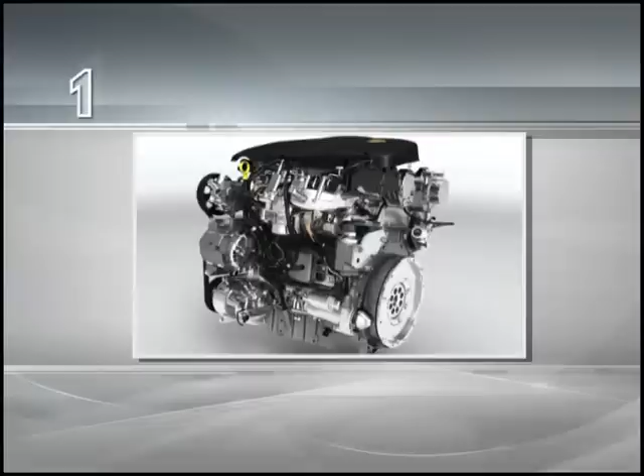The Insignia's A20NHT is the first direct injection petrol engine featuring both a turbocharger and variable valve timing to be used in a saloon car. These technologies provide the Ecotec engine with added power and responsiveness, while simultaneously reducing fuel consumption.

The engine has a power output of 162 kilowatts or 220 horsepower at 5,300 RPM and reaches its maximum torque of 350 Newton meters between 2,000 and 4,000 RPM. The A20NHT is based on the Z20NHH engine from the Opel GT.

In contrast to this engine, however, the power steering pump is in a different position. However, it continues to be driven by the V-belt. The position of the vacuum pump on the cylinder head housing is also new, as a result of which the housing has been redesigned in this area.

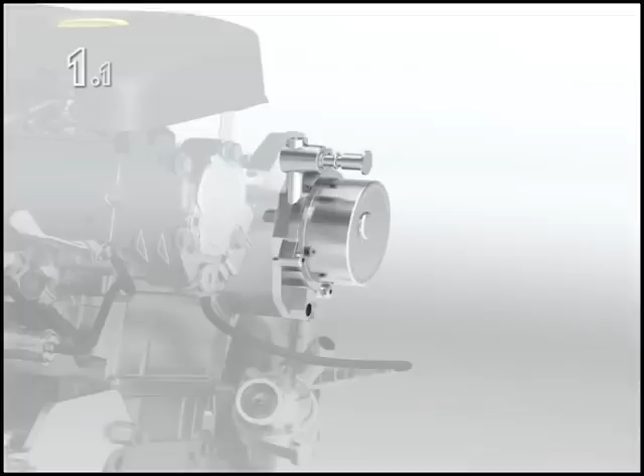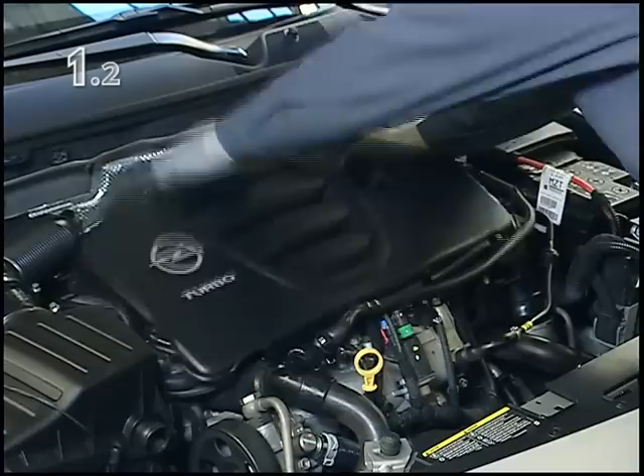Replacing the turbocharger in an Insignia with the A20NHT engine and all-wheel drive is a relatively complex procedure. First, the coolant must be drained and the battery earth cable disconnected. Lift off the engine cover and remove the air filter intake pipe. Remove the intercooler intake pipe and unscrew the turbocharger exhaust heat shield.

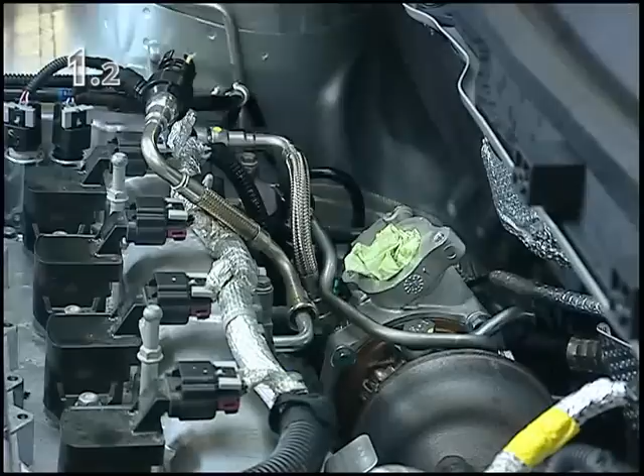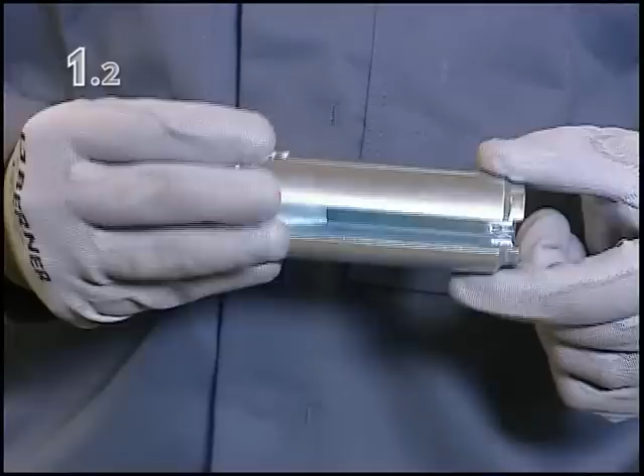Unscrew the coolant return line as well as the coolant feed line. Detach the vacuum hose from the turbocharger bypass valve. Detach the plug for oxygen sensor 1 and use the special service tool to remove the oxygen sensor.

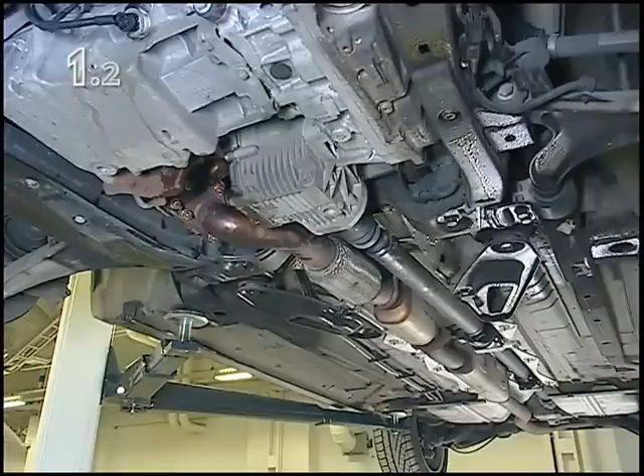Unscrew the 4 nuts for the catalytic converter from the turbocharger and detach the front wheel on the right-hand side. Undo the steering column universal joint to relieve loading on the steering gear. Detach the rear exhaust pipe as well as the propeller shaft. This procedure is described in detail in video VT76. Now unscrew the front exhaust pipe. The catalytic converter bracket and oxygen sensor 2 can now be removed.

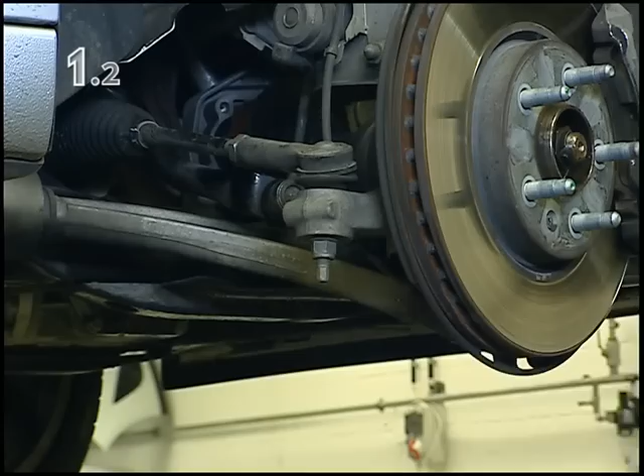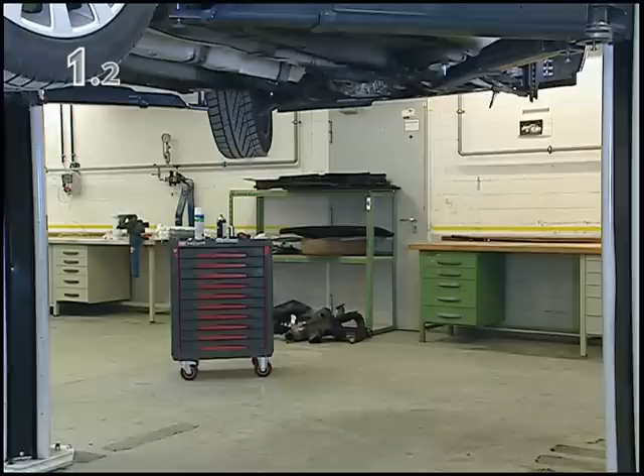Undo the stabilizer shaft link, as well as the tie rod. Remove the two lower plastic clips from the right-hand front wheel house trim. Likewise, remove the lower plastic clips on the front bumper fascia. Support the front axle body using a hydraulic jack at the location shown, and remove the front axle body reinforcement.

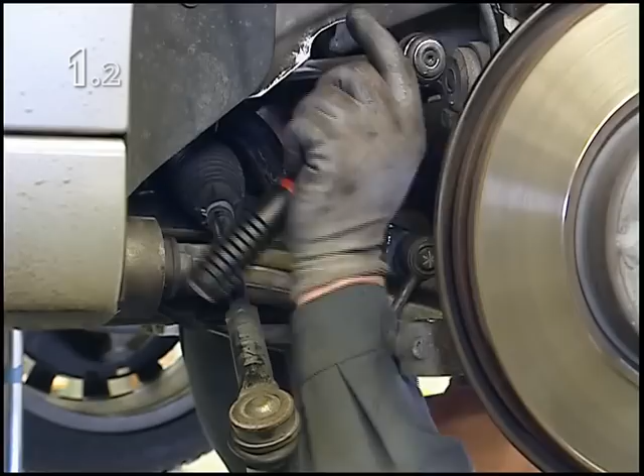Next, unscrew the fastening bolt for the reaction member damper. Detach the steering assembly heat shield and undo the stabilizer shaft bolts on the right-hand side. Now, lower the frame by no more than 50 millimeters. Remove the catalytic converter over the right-hand wheelhouse by rotating it clockwise, as shown.

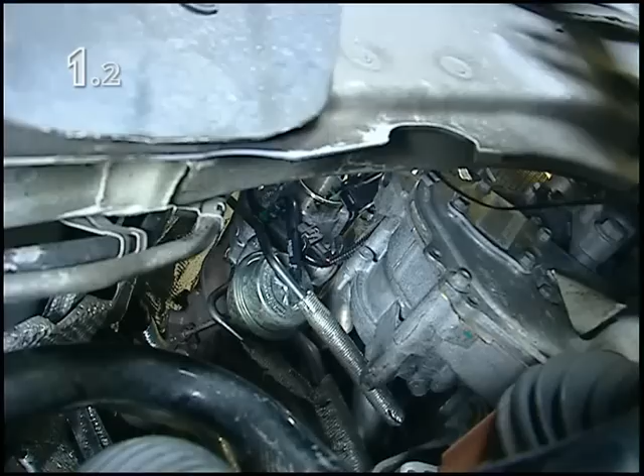Disconnect the wastegate unit solenoid valve from the turbocharger. Remove the strut from the turbocharger and unscrew the oil feed line. Detach the turbocharger oil return line and remove the gasket. Unscrew the turbocharger nuts.

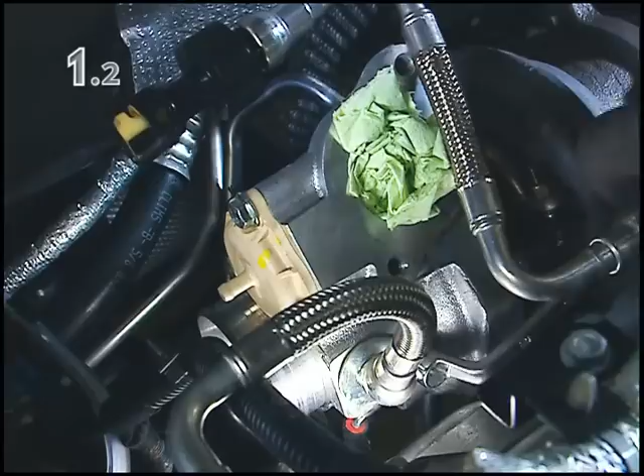Screw in the front axle body reinforcement bolts, hand tighten, and remove the hydraulic jack. Unscrew and detach the crankcase vent hose. Now, remove the turbocharger and take off the gasket. It's essential to clean the sealing flange and check it for any damage.

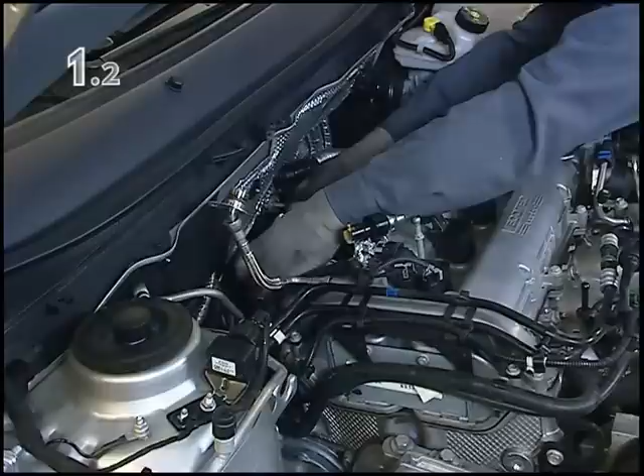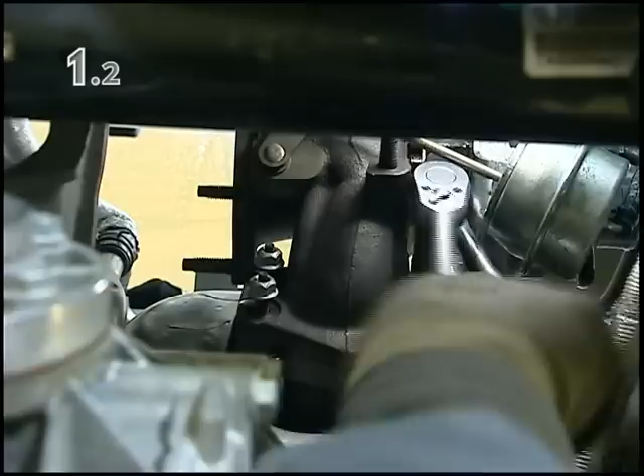Installation begins by inserting a new gasket and positioning the turbocharger. Fit the crankcase vent hose and reposition the hydraulic jack. Unscrew the bolts and lower the front axle body by no more than 50 millimeters. Screw on the turbocharger nuts and tighten as specified in the service literature.

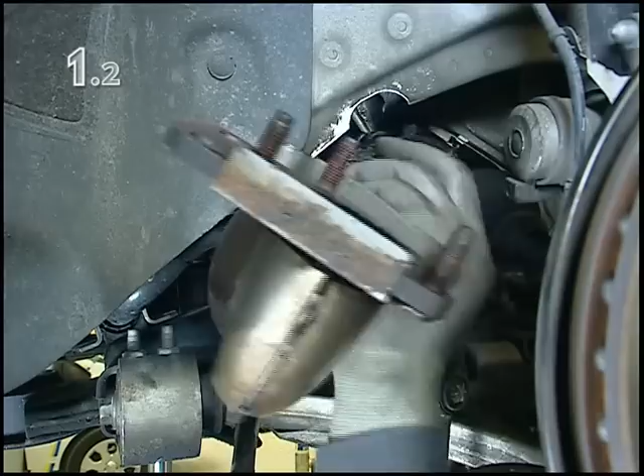Fit a new gasket to the turbocharger oil return line, connect and tighten the bolts as specified in the service literature. Repeat the procedure for the turbocharger oil feed line. Fit the strut to the turbocharger and connect the wastegate unit solenoid valve to the turbocharger. Fit a new seal to the catalytic converter. To install the catalytic converter, insert it over the right-hand wheelhouse as shown and rotate it anti-clockwise in order to position it correctly.

Tighten the bolts for the stabilizer shaft as specified in the service literature and reinstall the steering assembly heat shield. Use the hydraulic jack to raise the front axle body again. Screw in the bolts for the front axle body reinforcement loosely. Screw in the fastening bolt for the reaction member damper and tighten as specified in the service literature. The bolts for the front axle body reinforcement can now also be tightened as specified in the service literature.

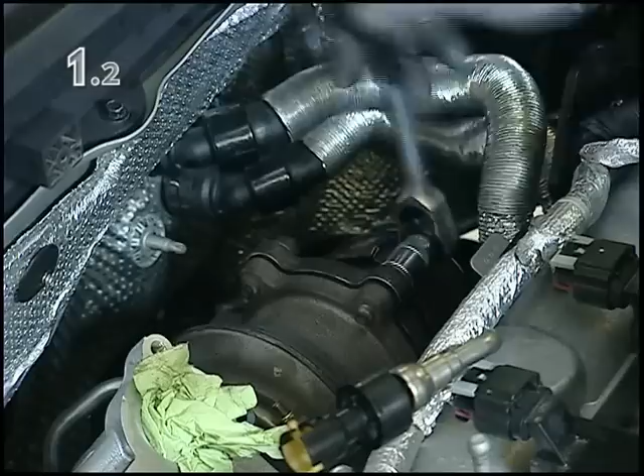Attach the catalytic converter bracket by first loosely screwing in the lower bolts and nuts so that the bracket can still be moved. Screw on 4 new nuts for the catalytic converter at the turbocharger and tighten as specified in the service literature. Now, tighten the bolts and nuts for the catalytic converter bracket as specified in the service literature.

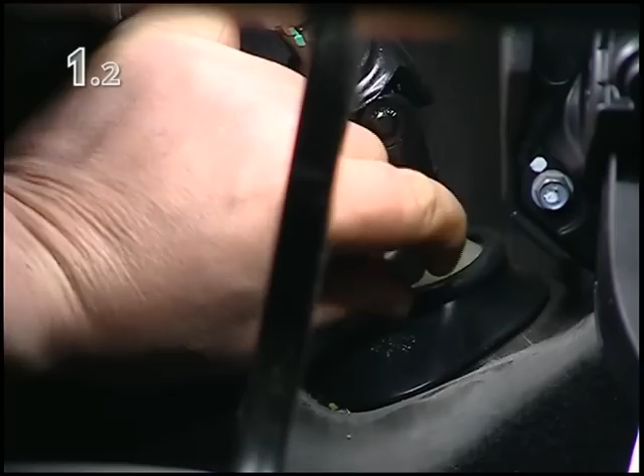Next, install the front exhaust pipe, the propeller shaft, and the rear exhaust pipe. Reinstall the steering column universal joint, and fit the right-hand front wheel. Install oxygen sensor 1 and connect the vacuum hose to the turbocharger bypass valve.

Attach the coolant feed line along with a new seal and connect the coolant return line with a new seal. Reinstall the heat shield. Connect the intercooler intake pipe and install the air filter intake pipe. Finally, attach the engine cover, top up the coolant and reconnect the battery.

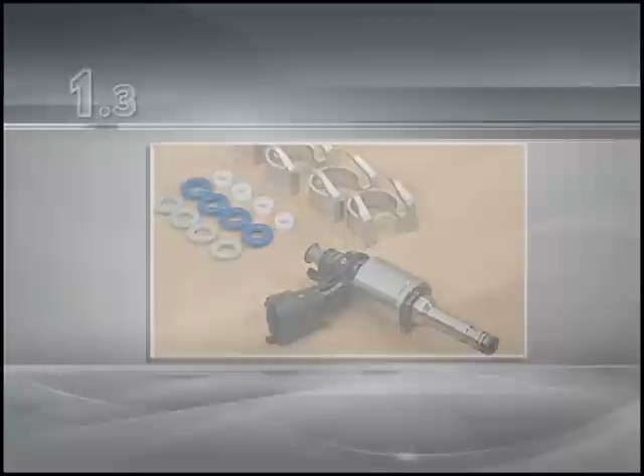Before removing the injectors, ensure that all pressure in the fuel system has been relieved. Then detach all relevant connections and parts. These are the purge control solenoid valve of the vapor handling system, the vacuum hose for the brake booster, the MAP sensor, the turbocharger control solenoid valve, the oil level indicator,

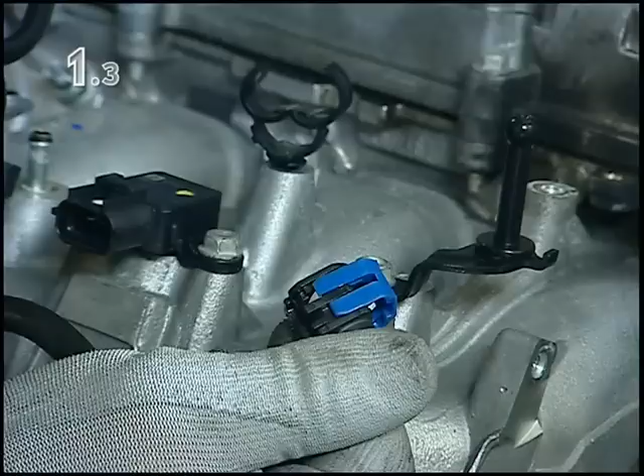the charge air hose to the engine, the intake manifold bracket, the fuel supply line, and the high-pressure pump feed line. The fuel lines should be sealed with plugs. Now, unscrew the intake manifold bolts and lift off the intake manifold as well as the gasket.

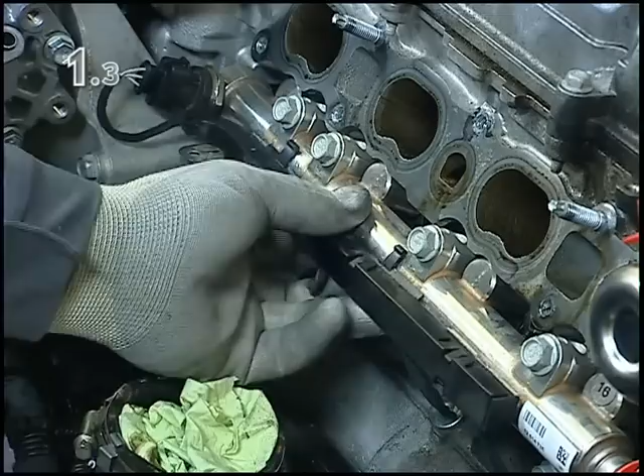Detach the electrical connector for the fuel rail and the acoustic insulation. Unscrew the high-pressure fuel line and seal all ports and openings. All 4 electrical connectors should be detached from the injectors. Unscrew the fuel rail bolts.

Now lever out the fuel rail. Use 2 screwdrivers and a length of hose when doing so, in order to avoid damaging the cylinder head. Remove the spring clips. And pull out the injectors by hand. If this proves difficult, use a special service tool, an adapter, and the slide hammer

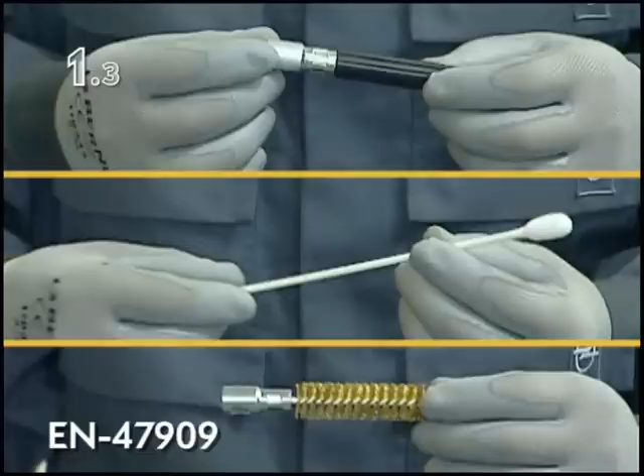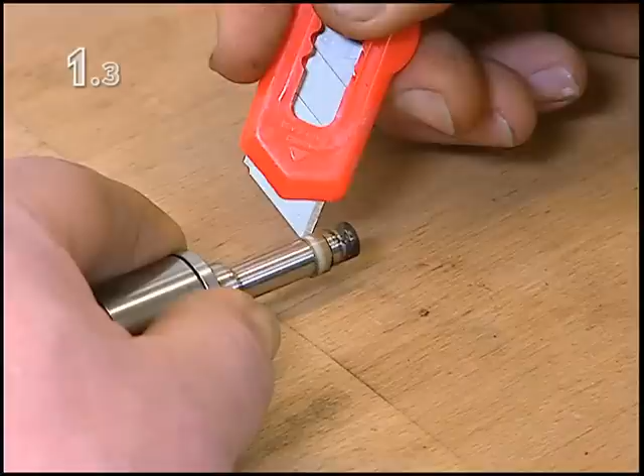to remove the valves. Use the cleaning kit to thoroughly clean the valve boreholes, as well as the intake manifold sealing surface. Remove the O-ring and the plastic spacer from the valve. Remove the seal ring as shown. Then clean the groove using a clean cloth.

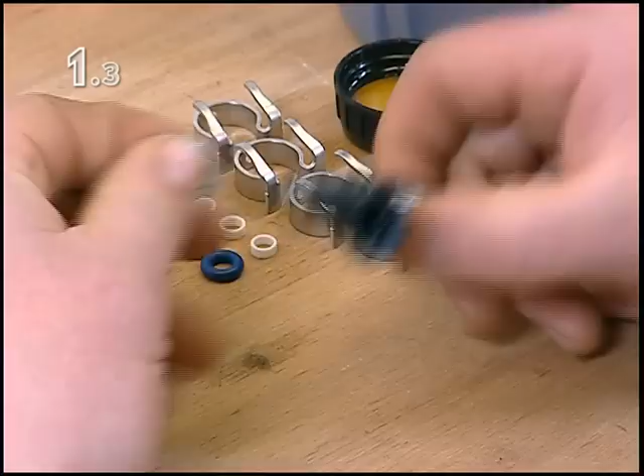Inspect the injectors thoroughly for any damage. All parts shown here must be replaced. When inserting the plastic spacer, ensure that it's positioned correctly. The wider sealing surface must point towards the O-ring. Insert a new spacer, position a new oiled O-ring and attach a new spring clip.

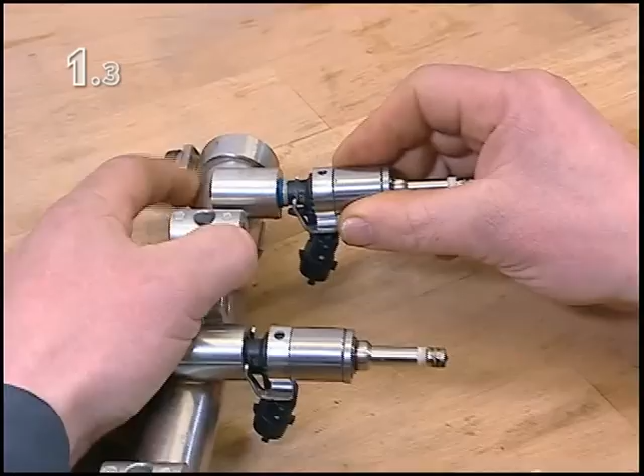Use the installer to pull on and position the seal ring as shown. Insert the injectors into the fuel rail. And push the installer onto each of the 4 injectors once more. Then, immediately insert the fuel rail. Screw in the bolts and tighten as specified in the service literature.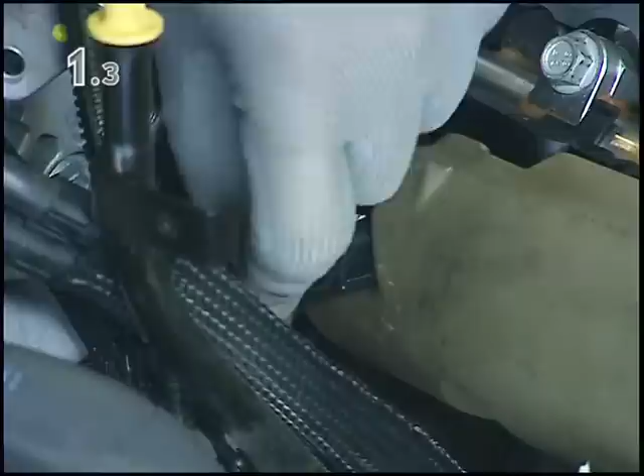Reconnect the electrical connectors for the injectors. Insert the acoustic insulation. And restore the electrical connection to the fuel rail. Fit a new high-pressure fuel line and tighten the nuts to the correct torque as specified in the service literature.

Insert a new intake manifold gasket. Position the intake manifold, screw in the bolts and tighten to the correct torque as specified in the service literature. Reinstall and connect all remaining parts. Finally, with the engine running, perform a visual inspection for fuel system tightness. Follow the safety instructions whilst doing so.

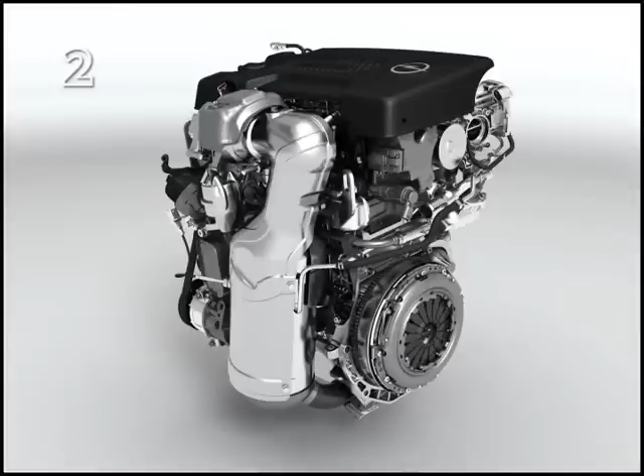Updates of the 1.3-litre diesel engines with 2 performance levels are available for the Corsa D, Meriva B and Astra J. One version has an output of 55 kilowatts and generates a maximum torque of 190 Newton meters at 1750 RPM. A more powerful engine develops 70 kilowatts. It generates a maximum torque of 210 Newton meters at 1750 RPM. Both engines meet the Euro 5 emission standard. This required some significant changes to be made compared to the previous engines.

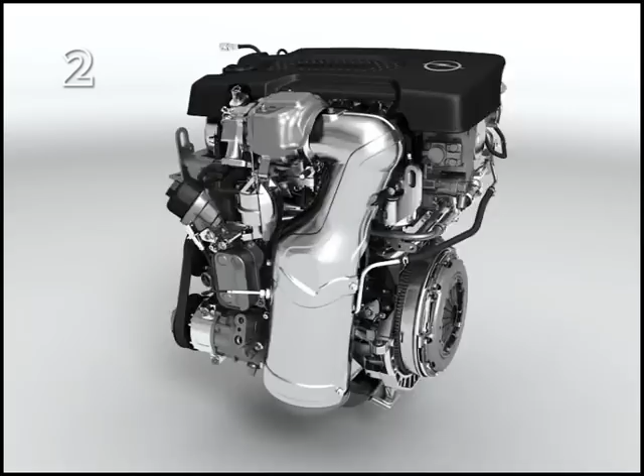Whereas the 1.3-litre diesel engines previously featured underbody particulate filters, a close-coupled particulate filter is now being introduced. This has meant repositioning the temperature sensor as well as the differential pressure sensor. The new particulate filter also affects the position of the turbocharger. The oxygen sensor also has a new position. In addition, a new exhaust gas recirculation cooler is used.

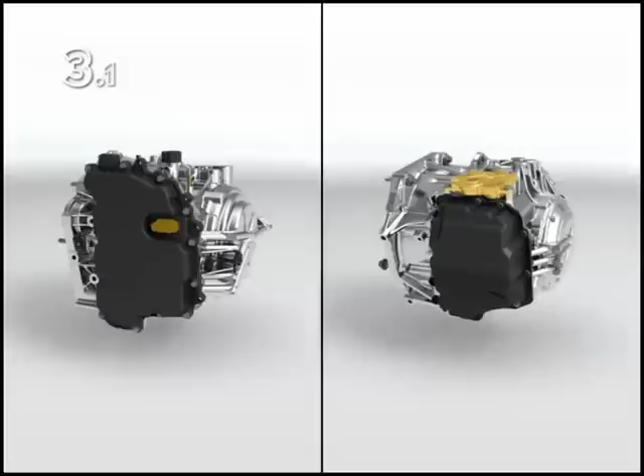The maintenance-free GF6 automatic transmission, developed within the GM Group, will have its debut in Opel's Astra J. The GF6 transmission is clearly distinguishable from the AF40 transmission. Whereas the control unit for the AF40 is attached to the outside of the housing, the plug in the cover of the GF6 indicates an internal control unit.

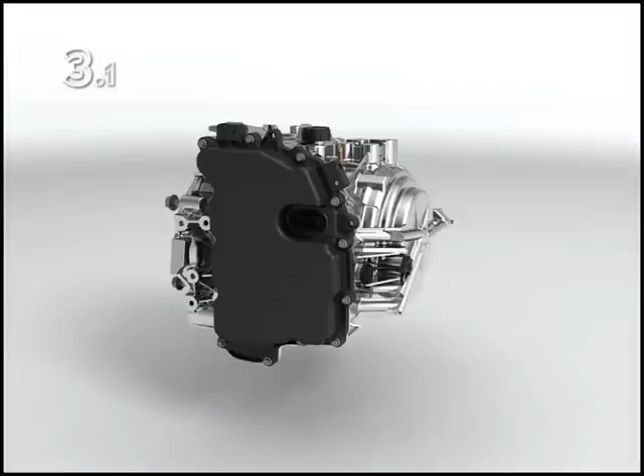The GF6 is available in the Astra in combination with the A20NHT, A16XER and A16LET engines. A distinction is made between the transmission variants 6T40 and 6T45. To identify the transmission variant, locate the area shown on the lower side of the transmission housing. If the space indicated is approximately 6 millimeters, then it is a 6T40 transmission. The space is around 12 millimeters in the case of a 6T45.

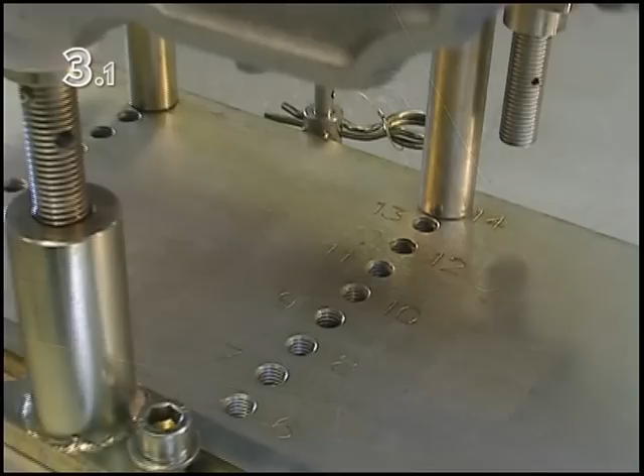Removal and installation of the transmission requires use of the transmission holder. The positions of the individual adapters are specified in the service literature. After removing the transmission, the torque converter must be fixed in position using a special retainer.

Before carrying out any service work on the transmission, fluid must be drained. After the job has been completed, top up with new fluid. Use the same amount of fluid as was previously drained. Then check the transmission fluid level. Begin by starting the engine. And with the brake pedal pressed, move the selector lever through all of the modes, leaving it in each one for approximately 3 seconds. Then move the lever back to park.

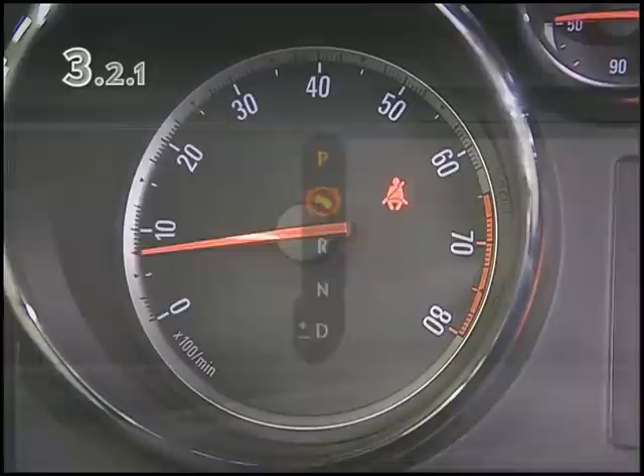Let the engine idle for at least 3 minutes to allow foaming, which may have occurred, to recede and the fluid level to stabilize. With the engine running, monitor the transmission fluid temperature using the probe. It must remain between 85 and 95 degrees Celsius. Otherwise, a correct top-up is not possible. This could lead to a damaged transmission or oil leakage.

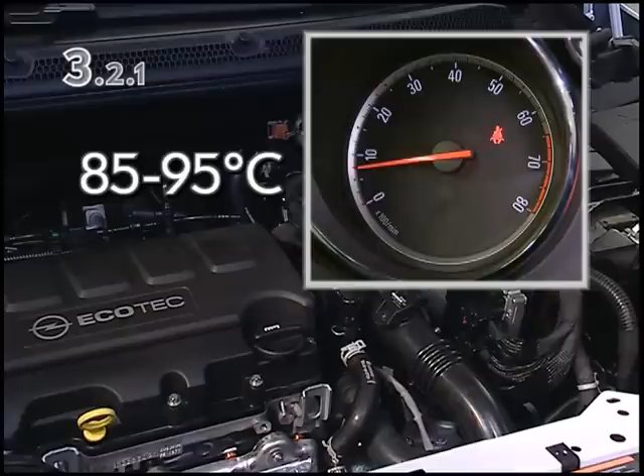Unscrew the filling hole cap along with the vent hose. Raise the vehicle with the engine idling. Unscrew the fluid checking bolt. The fluid level is correct if the transmission fluid trickles out of the check bore. In this case, screw in the fluid checking bolt again. Wipe away fluid residue from the housing and tighten the bolt as specified in the service literature.

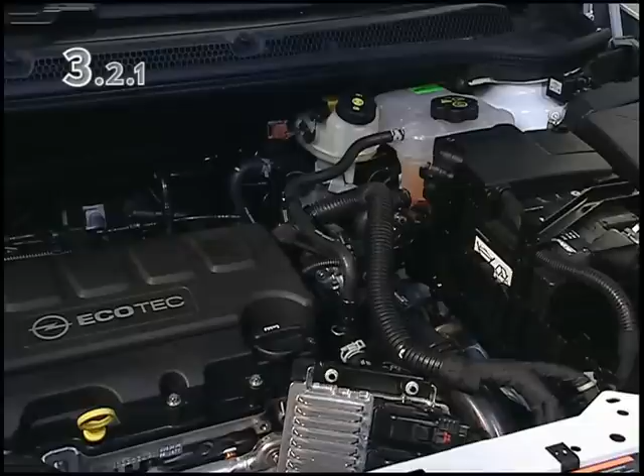If no transmission fluid flows out of the check bore, then lower the vehicle again and, with the engine running, slowly top up the transmission fluid via the filling hole until it flows out of the check bore. Allow it to flow until it becomes just a trickle. Tighten the filling hole cap, including vent hose.

Raise the vehicle and screw in the fluid checking bolt. Wipe away fluid residue and tighten the bolt. Finish by examining the transmission for external leaks.

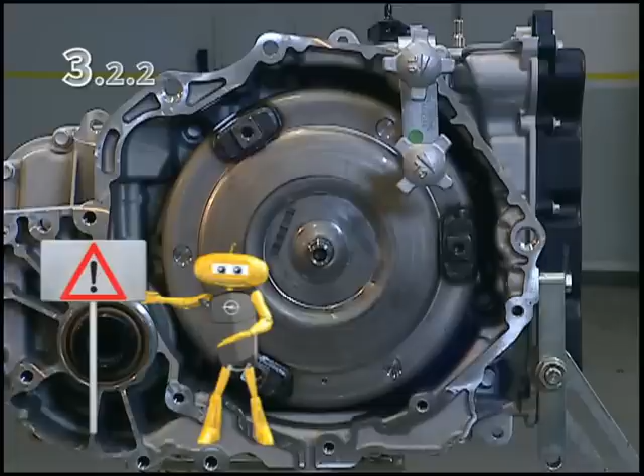For reasons of clarity, the following procedures are demonstrated on a removed transmission. They can, however, be performed with the transmission in place. Note that cleanliness is essential during work on the transmission. Also note that despite the drained transmission fluid, some fluid will remain in the transmission. In order to perform work on the valve body, begin by unscrewing the cover of the transmission control valve housing.

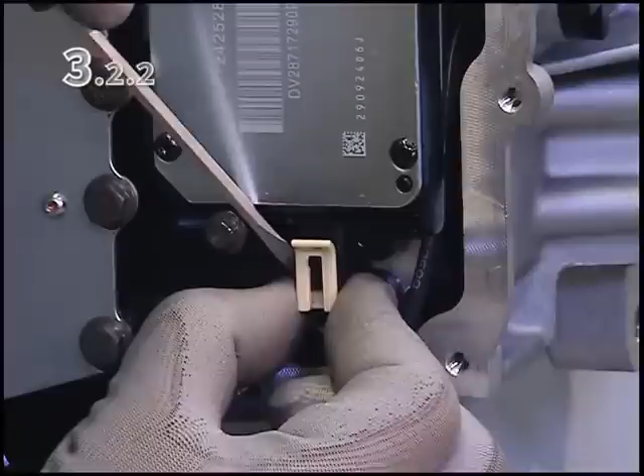Detach the electrical connector for the output speed sensor. The connector for the selector lever position switch should be released and detached, and the connector for the input speed sensor removed. Unscrew the 3 bolts on the transmission control unit as well as the 12 bolts for the control valve. And remove the entire group.

Detach and dispose of the filter panel. Take care while doing so. A broken or missing fastening strap may cause the filter panel to sit incorrectly, resulting in potential damage or contamination to the group. The pressure switch seals and channel plate bolt through holes must be checked for damage. Replace the control valve group if necessary.

Remove the oil guide tube, including thermostat, and remove its gasket. Unscrew all 11 bolts from the control valve body. Bear in mind that the bolts have different lengths. Then remove the control valve body. Also remove the spacer.

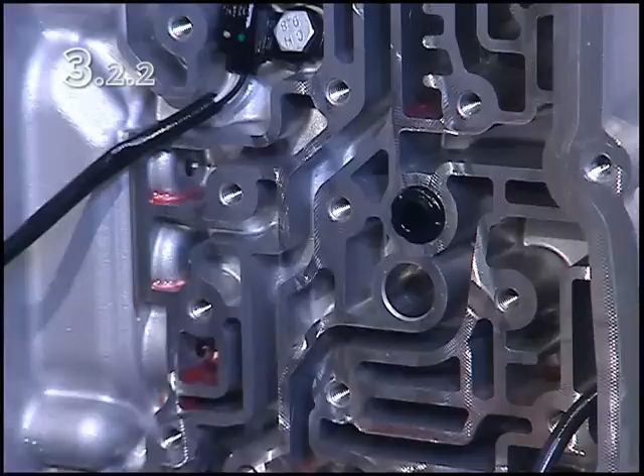Remove the spring for the selector lever position switch. Remove the 2 oil duct seals, dispose of them, and replace with new ones. Insert the spring for the selector lever position switch. And tighten the bolt as specified in the service literature. Insert the spacer, and reposition the control valve body. Tighten the bolts to the correct torque in the order specified.

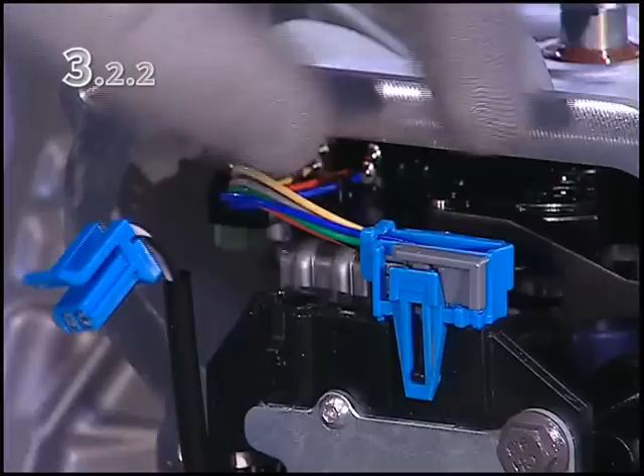The connector for the selector lever position switch should be connected and secured, and the connector for the output speed sensor reconnected. Likewise, the connector for the input speed sensor. Remove the control unit connector seal and replace with a new one. The same applies to the control valve housing cover gasket.

Reattach the cover and tighten the bolts as instructed in the service literature. Once the repair is complete, perform the programming, setup and training procedures as specified in the service literature.

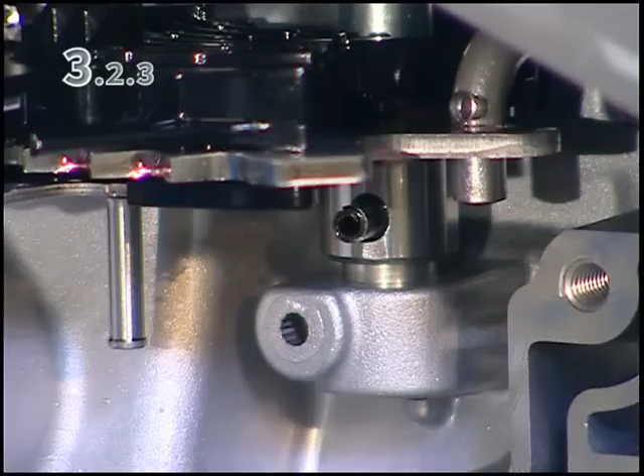To replace the selector lever position switch, the control valve must first be removed. Then pull out the gear shift shaft pin using a suitable tool. Use a pair of pliers to remove the locking pin for the selector lever position switch and dispose of it. Remove the gear shift shaft and selector lever position switch.

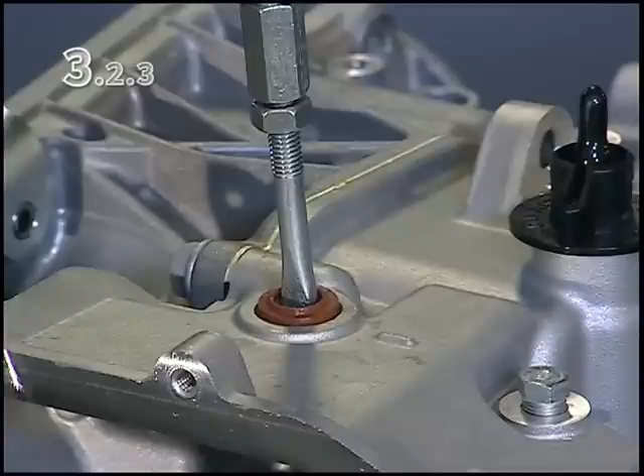Use a slide hammer and extractor to remove the gear shift shaft seal, and use the installer to insert a new seal. Position the selector lever position switch and insert the gear shift shaft.

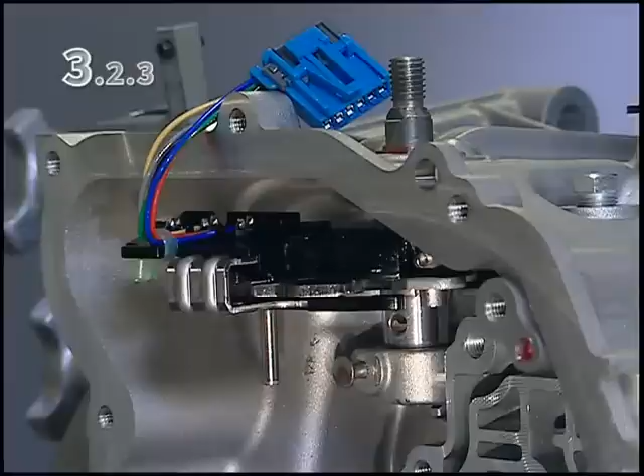Use the installer to fit a new gear shift shaft pin. A new pin must be used to ensure proper connection with the housing. Then check whether the installation depth matches the dimensions specified in the service literature. Now install the locking pin for the selector lever position switch using the special service tool. And as before, check that the installation depth is correct according to the service literature.

Following installation of the control valve body, it's essential that the selector lever position switch is in the position shown, otherwise shift operations will not be possible. Finally, reinstall the control valve housing and perform the training procedure.

If a diagnosis reveals that one of the speed sensors is defective, the control valve housing must first be removed. If the output speed sensor requires replacement, unscrew its bolt. Remove the sensor and replace with a new one. Finally, tighten the bolt as specified in the service literature and perform the training procedure.

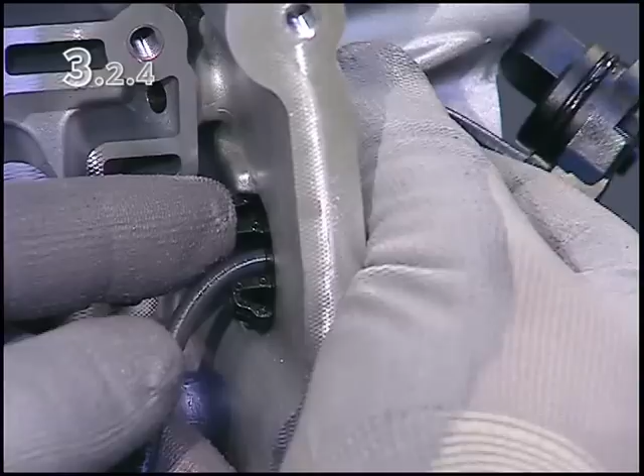The input speed sensor must be removed if the sensor is defective or the seal is damaged, although the rear sensor seal can be replaced without removing the control valve housing. To remove the sensor, unscrew the bolt. Turn the sensor through roughly 90 degrees and undo the two retaining tabs from the transmission housing, as shown. The sensor can now be taken out.

Remove the 3 sensor seals and replace with new ones. Position the input speed sensor and check that the retaining tabs engage correctly. Insert the bolt and tighten as specified in the service literature. Finally, fit the control valve housing and perform the training procedure as specified in the service literature.

To replace the left-hand seal for the front-wheel drive shaft, use the slide hammer and the seal puller to remove the seal. Use the handle and the installer to insert the new seal. The same procedure applies for replacement of the seal on the right-hand side.

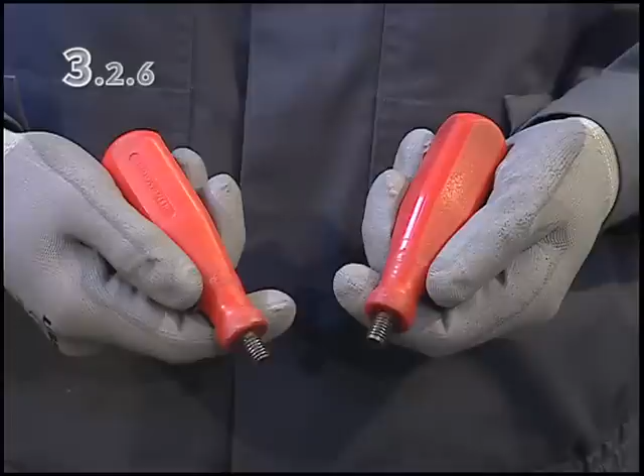Replacement of the torque converter and its seal is always performed in the removed state. As oil flows out in the process, always place a collecting pan underneath. In the removed state, the converter is held by a special retainer. To remove the converter, 2 handles should be screwed on and the special retainer removed. The torque converter can now be taken out.

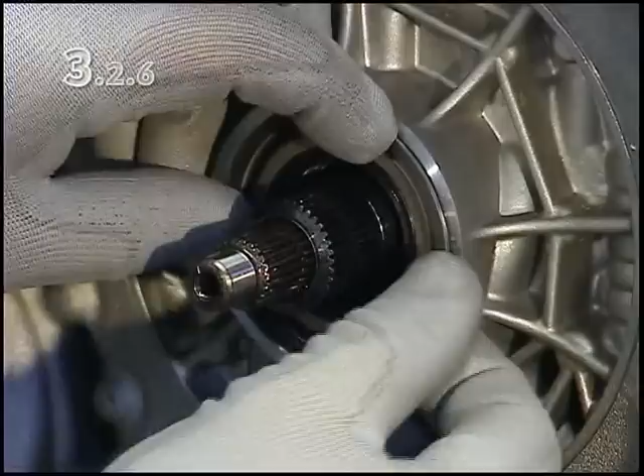To replace the seal, begin by removing the circlip. Use the slide hammer and extractor to remove the seal and replace it with a new one. Insert a new circlip. Position the torque converter and bolt on the special retainer. Finally, unscrew the two handles.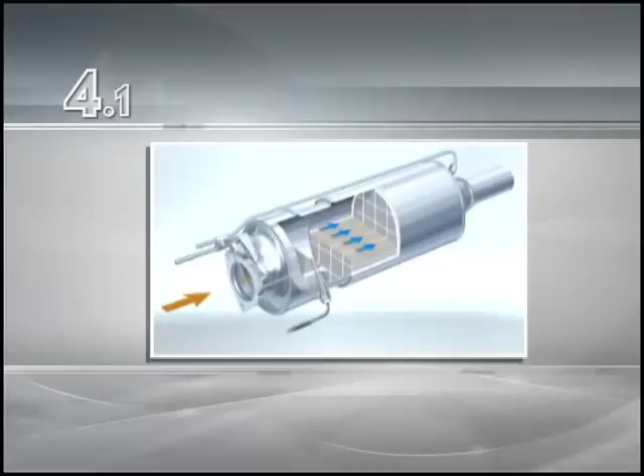Exhaust emissions such as hydrocarbons, carbon monoxide, nitrogen oxides and particulate matter are minimized in the diesel exhaust gas treatment system. Depending on the model and engine, diesel vehicles either have an underbody particulate filter or a close-coupled version. The maintenance-free diesel particulate filter removes soot and unburned hydrocarbons from the diesel exhaust. It consists of a hard, honeycombed housing of silicon carbide with numerous microscopically small channels and is coated with a noble metal. The exhaust emissions flow through the channels and soot particles are deposited on the channel walls.

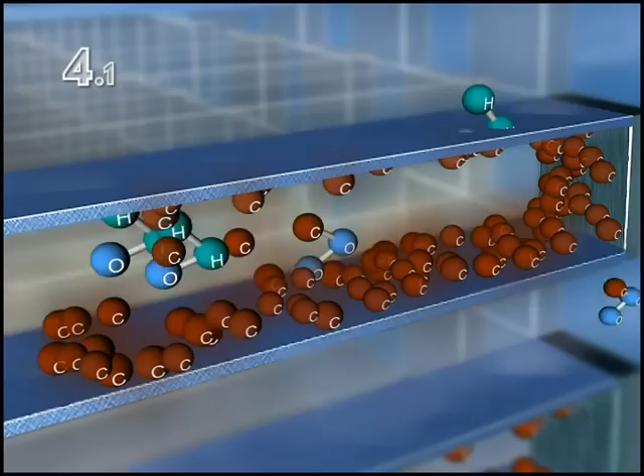Depending on the driving profile and soot development, the particles are burned within the particulate filter channels via a process known as regeneration. The fill level is determined by the differential pressure sensor. The regeneration process thereby prevents clogging of the diesel particulate filter and helps maintain consistent engine performance.

The ECM engine control unit triggers regeneration when the filter is full. Regeneration is performed while the vehicle is being driven. The regeneration procedure begins with a delayed and extended post-injection, thereby increasing the temperature in the catalytic converter.

Thanks to a further post-injection, unburned fuel enters the exhaust system. As the fuel afterburns in the catalytic converter, the exhaust temperature rises to around 600 degrees Celsius. The particulate filter heats up and burns the soot deposits to form carbon dioxide.

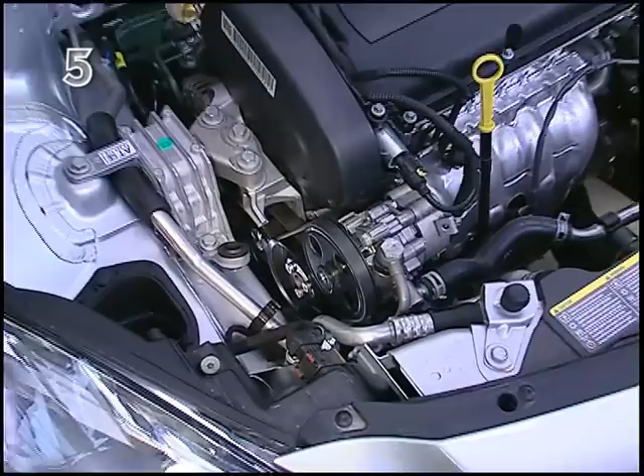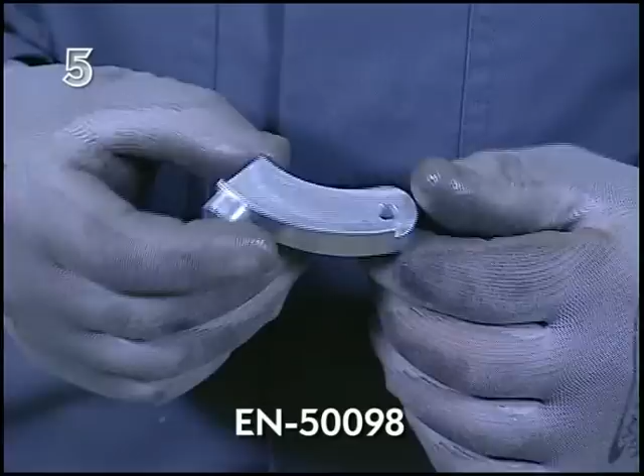The Insignia and some Astra J models with hydraulic steering feature an elastic power steering pump belt. In order to replace the belt, cut it using a pair of side-cutting pliers. Under no circumstances should you detach and reuse the belt, as non-visible damage occurs during removal. Attach a ratchet to the crankshaft and position the installer and the new belt.

Slowly turn the engine clockwise using the crankshaft, thereby fitting the belt. It's essential that the belt fits onto the power steering pump pulley correctly. Remove the installer and check that the belt has been installed correctly.

Observe all safety regulations during servicing work on the high-pressure fuel lines. In addition, ensure that pressure in the system has been relieved. To replace the lines, begin by removing the engine cover and detaching the overflow oil lines. Unscrew the nuts and detach the lines. Attach the new lines and screw on the nuts by hand initially.

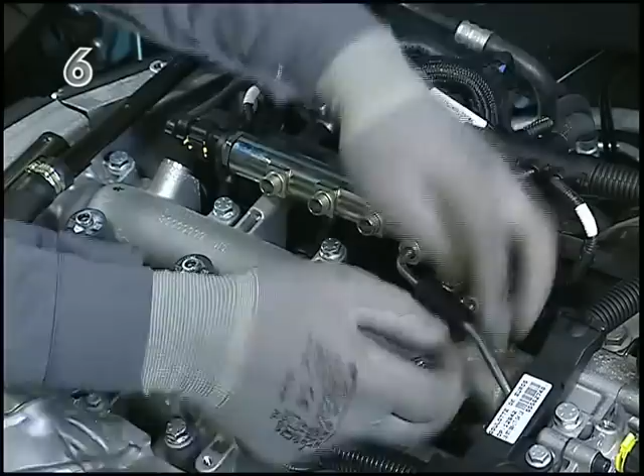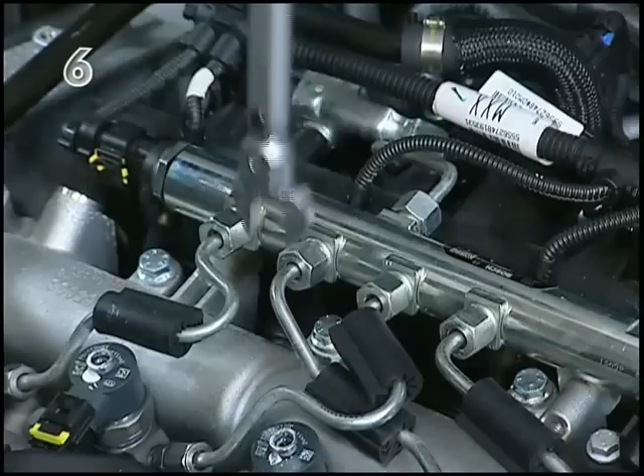To tighten to the correct torque, use an open-ended torque wrench. When tightening with the torque wrench, it's essential that you comply with the tightening torques specified in the literature. Otherwise, leaks or damage may result. Always bear in mind that the size of the nut gives no indication whatsoever regarding the required tightening torque. Reinstall the overflow oil lines and check for leak tightness. Finish by reattaching the engine cover.

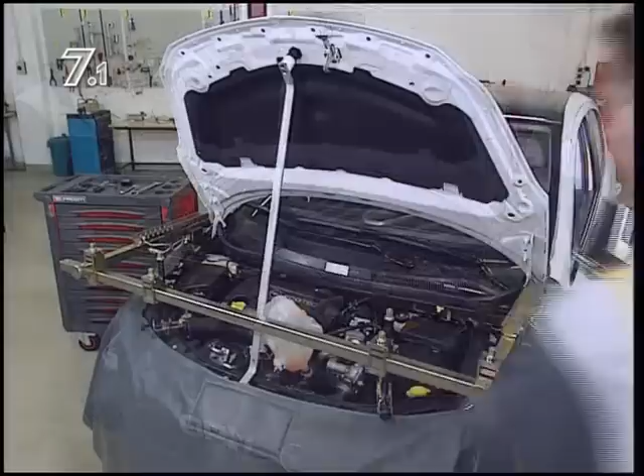The engine bridge carrier and engine bridge are the tools for precise and safe servicing work on the engine and transmission. The concept, co-developed by General Motors and SPX Service Solutions, guarantees the highest possible occupational safety and prevents damage to vehicle components. Each vehicle has its specific mounting points. The engine bridge carrier and engine bridge can be easily adapted to fit various models such as the Astra J, Insignia and Meriva B. Further information on this subject is available in service videos VT62, VT67, VT73 and VN15.

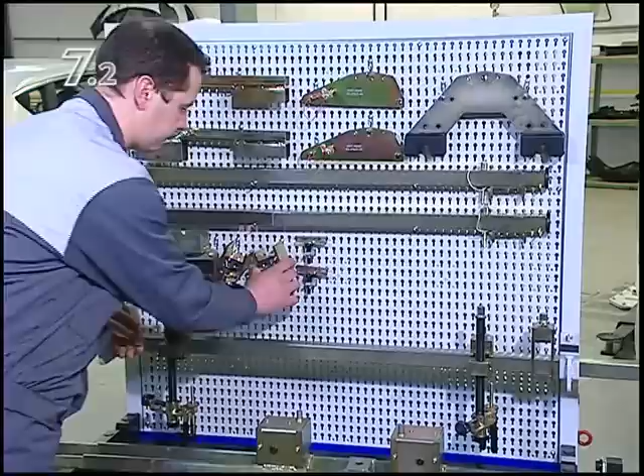The flexible engine bridge carrier concept has now been extended by SPX Service Solutions to include a workshop trolley concept. All previously developed adapters for the engine bridge carrier and engine bridge can be stored in large drawers, thereby protecting them from damage and loss and ensuring that they're readily at hand. In addition, the new workshop trolley offers space for tools, such as the existing universal transmission jack, that are required for procedures in combination with the engine bridge. This also helps to streamline service work.

The engine bridge can also be pre-assembled directly on the workshop trolley. This saves time and is both safe and ergonomic. Detailed assembly instructions are included in the supply scope. Both workshop trolleys and instructions will be amended and extended for future models.

Another major advantage is increased mobility. The trolley can be moved safely and without any effort around the workshop. In addition, the workshop trolley can be transported using a suitable vehicle, thereby allowing the engine bridge to be used in other service workshops as well.